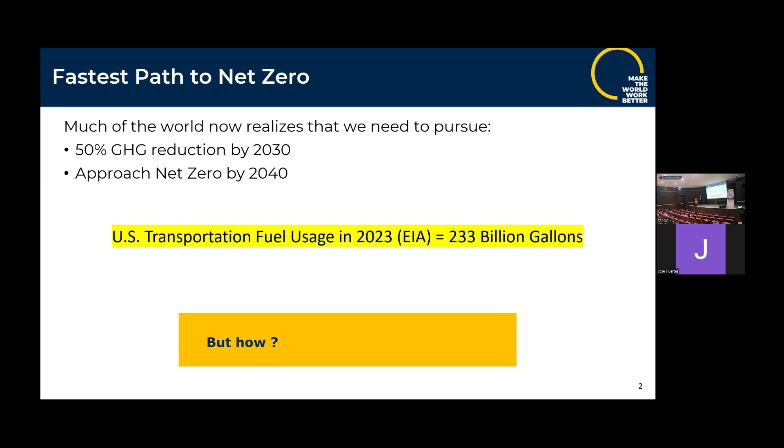So what do we do? I'm going to put on my timer to remind myself to stay on time. There we go. So how? Well, again, we can learn some lessons from the past, and that'll be part of what I'll cover this morning.

Okay, so what must we do? Well, we must replace the fossil energy we've been consuming, which is basically an interruption of the biogenic carbon cycle. In the biogenic carbon cycle, we have plants doing photosynthesis. Those plants are eaten by animals, and then those animals are eaten by other animals. All of us end up as dead organisms. And in certain unique circumstances in the history of the planet Earth, some of this biomass got sequestered and became the fossil fuels, an enormous reservoir of carbon. And we've been digging that out at an incredible rate all around the world and adding back carbon to the atmosphere that has been locked away for 30 to 300 million years.

What we'd like to do is move to something that looks more like the biogenic carbon cycle, where we're taking CO2 from the air through plants, or through direct air capture, or by capturing CO2 at the uses of fuel at point sources, and turning it back into fuel. Long term, that's what we must do, in addition to eventually removing some of the excess carbon dioxide from the atmosphere to get back to maybe 350 parts per million. So how do we do that? Well, we need to be mimicking Mother Nature and using the biogenic carbon cycle to create a kind of anthropogenic carbon cycle, a human-driven carbon cycle.

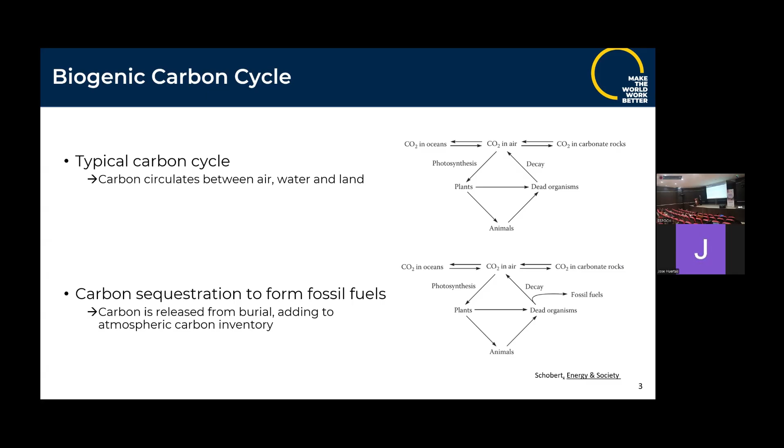So in the US and some of the world, we've been focused on vehicle electrification. We've started to have regulations in certain parts of the world, like California, that seem to indicate that engines are going to be banned, that engines are bad. Well, as I explained in our lecture yesterday on the future of the IC engine, engines aren't the problem. What we feed the engines is the problem, fossil-based fuels.

And now we have many choices we can make in electric vehicles. I'm driving an electric vehicle now because it was at a very good price, and it's actually a wonderful car. And even companies like Hertz were, for a time, renting electric vehicles. So imagine going to the city of San Francisco, California. You don't know the city, and you pick up an electric vehicle. Where are you going to charge? You might not even know your way around. So unless you had an app that could tell you where to charge, that might be a real problem and not a good idea.

So yes, the emphasis on electrification is perhaps too heavy. And in the US, it seems that consumers have signaled to industry that we need to go to something in between. Maybe there'll be more plug-in hybrids, which act like an electric vehicle but give you the unlimited range you might need on certain days. And that fits into the previous administration's blueprint for a future transportation strategy and how to decarbonize. We want convenience, otherwise consumers will not buy those vehicles. We need efficiency to use whatever low carbon energy we have as efficiently as possible. And it needs to be clean. It needs to be low carbon. It needs to lead to lower emissions from engines.

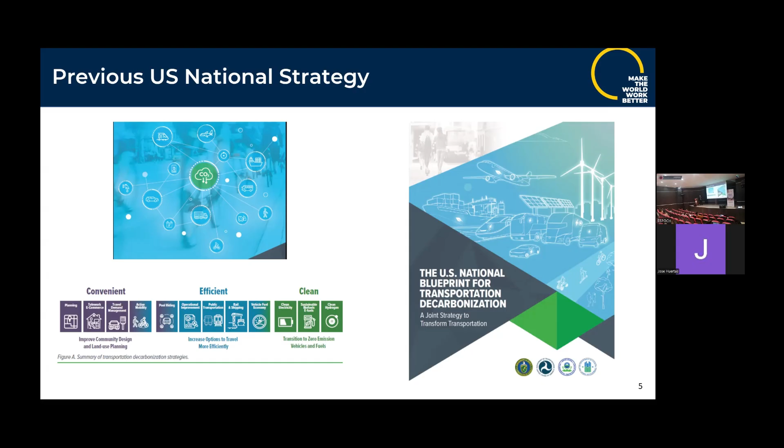In the final draft of this document from the Biden administration, they ended up adding a lot more emphasis on sustainable liquid fuels, which I thought was a good idea. All they had been talking about in the early years of the Biden administration is electric cars solving all our problems, and clearly that's not true, or ramping up hydrogen. While I'm very interested in hydrogen and I'm co-coordinating a hydrogen alliance for North America with a colleague at UC Riverside, hydrogen is going to take a long time to make much of an impact on our carbon emissions. So where we need to focus is sustainable fuels, mostly biofuels in the near term.

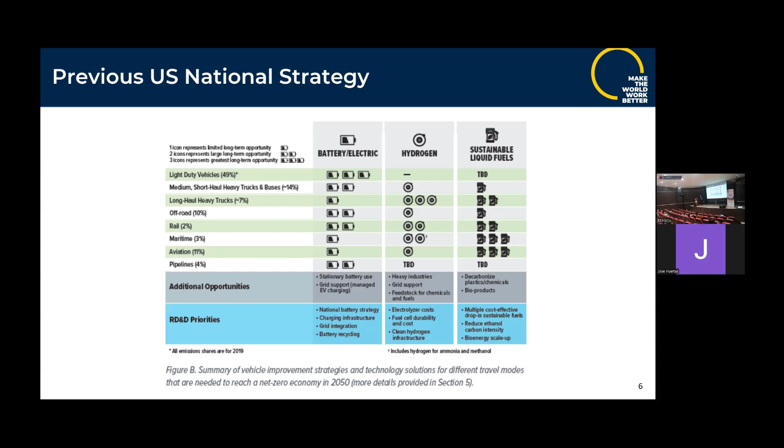In the US, we've had for more than 20 years an idea that we could produce something like 1 billion tons of biomass, which could turn into a lot of fuel. That billion-ton study, led by the Department of Energy, assumes we'll do this sustainably, so we can do it into the future, ad infinitum. From that, we could potentially get maybe 70 billion, and the newest number now is 73 billion gallons of fuel.

If we look at transportation, we use 233 billion gallons of gasoline equivalent between gasoline, jet fuel, and diesel fuel. If you take that and turn it into quadrillions of BTUs, that's nearly 28 quads. A quadrillion BTU, or quad, is 10 to the 15th BTUs—a convenient number to describe US energy consumption. We use a bit over 90 quads a year across all forms of energy.

I'll come back to that idea in a minute. But right now we consume about 9% of our total energy as renewable energy. In the transportation fuels area, maybe we can make 73 billion gallons of fuel. We could replace about a third of what we need with biofuel sustainably.

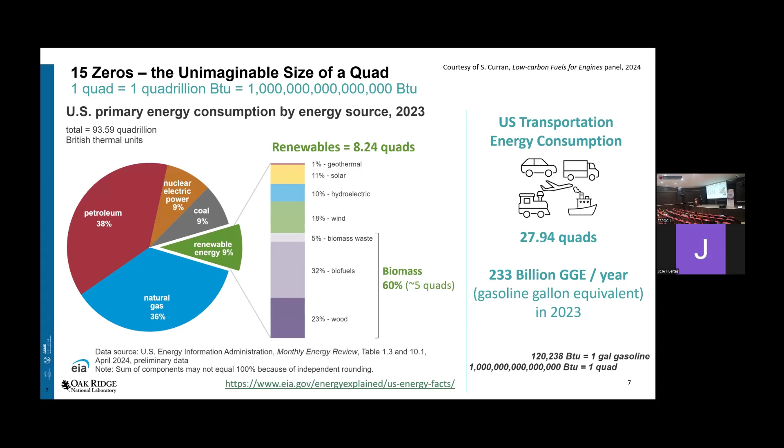So in that billion-ton study, they've looked at the different sources of biomass. This is where they've got this new number. This report, the billion-ton study, was updated in 2023. We think now we can make 1.3 billion tons of biomass from a variety of different sources.

This could be used, and needs to be used, to cover aviation fuel. We're not going to be riding around in hydrogen-powered planes anytime soon. We looked at that during the Reagan administration—my father worked on a project related to that. It's not a good idea.

So for aviation, we need liquid fuels from biomass or synthetic fuels. Off-road and rail may be hard to operate on electric, so they may need these biofuels too. We're also going to need some of this for on-road, long-haul trucks. So how this fuel gets used will be a matter of which has the highest priority. Decarbonizing aviation right now is a big priority in the United States, so a lot of that biomass is going to go toward making sustainable aviation fuel.

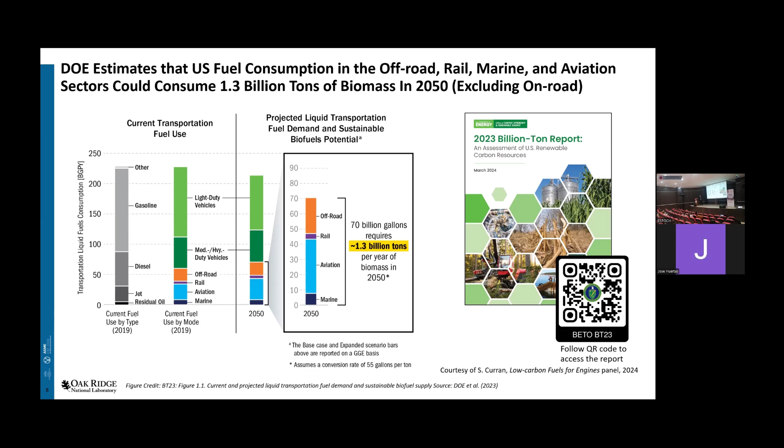If we look at how we might make this fuel, we'll continue in the US to rely on corn and oils from plants like soybean and canola, and maybe winter cover crops like covercress or Brassica carinata. We will make ethanol, biodiesel, and renewable diesel—fuels we're familiar with. Generally we need to make fuels we're familiar with because they have to meet codes and standards, or else they're going to have problems in the engines and vehicles we drive.

Another thing we see in the evolution of our biofuel and replacement fuels is that many of these fuels aren't like the fuels we use today, and that's going to create some challenges—meaning there's a lot of engineering left to do in internal combustion engines and low carbon fuels. We're far from done, and there's a lot of great discoveries to be made.

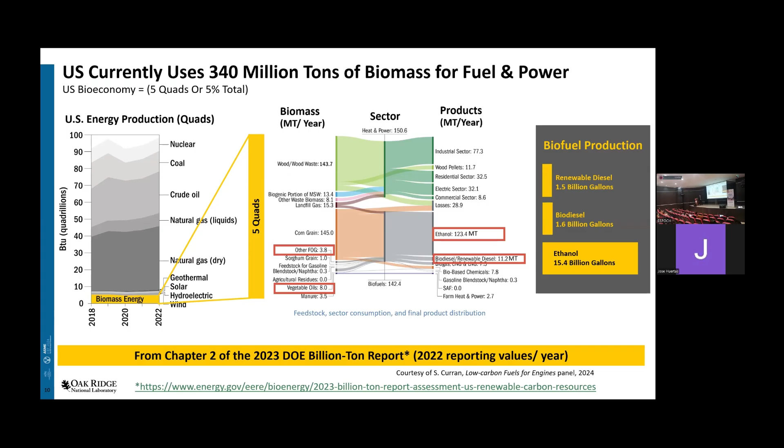Renewable diesel, from tables produced by the federal government's Energy Information Administration, showed in 2022 we made 18 billion gallons, over 17 of ethanol, 2.2 of biodiesel, and we had the production capacity to make this much, plus 1.5 of renewable diesel. I saw a report in 2022, while working on a book chapter, that said this was going to increase from 500 million gallons a year in 2019 up to 5 billion gallons a year by end of 2024. But there's no way. Well, in fact, in January 2025, we got to 4.5 billion gallons a year of renewable diesel production capacity.

There's so much pull for this in California, where they have to meet the requirements of the low carbon fuel standard, that there's a big pull on supply. It makes it hard to get this fuel in my state, Michigan. Our transit system, which I've worked with, has run a bus and other things on renewable diesel, but our fleet managers have said we can't count on getting the fuel, so we're not going to bother. But it worked great—it's a drop-in replacement, and that's why there's so much demand for it.

So this is explosive growth in capacity. We've reached something like 25 billion gallons total of biofuel. That's only 10% or so of what we need, but it's a lot more than we were making just 10 years ago. So things are improving.

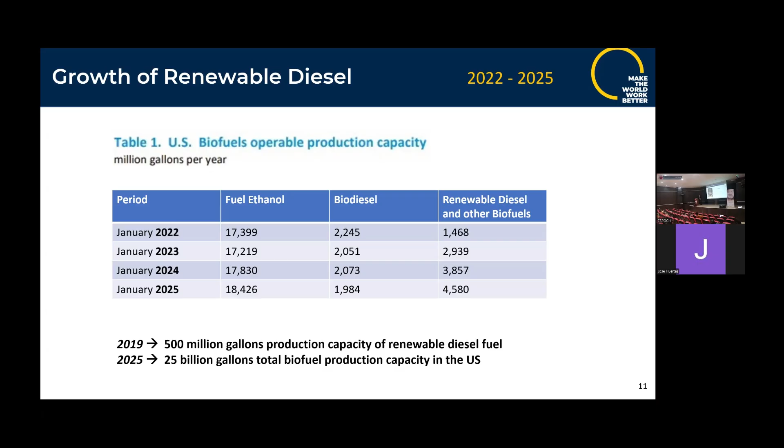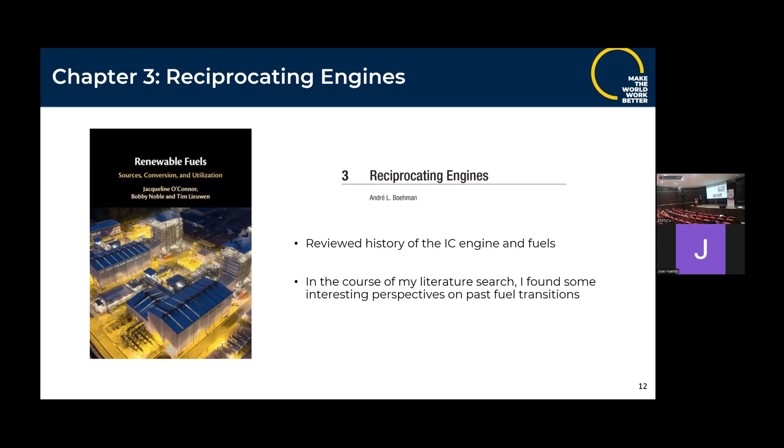So if we think about the United States just 200 years ago, in the 1800s, how did people get around? Well, horses and other animals—horse-drawn carriages or riding horses directly, mules pulling barges along the Erie Canal or other waterways, man-made or natural, throughout the United States. We relied on animals, and the animals are fed biomass. They're indirect bioenergy conversion systems. It's one way to look at it.

But then later in the 1800s, we started producing large amounts of coal. We're the Saudi Arabia of coal, the United States and China—we're both the Saudi Arabia of coal. We have 25% of the world's coal, as does China. So we became big coal producers, and we moved to coal-fired steam locomotives.

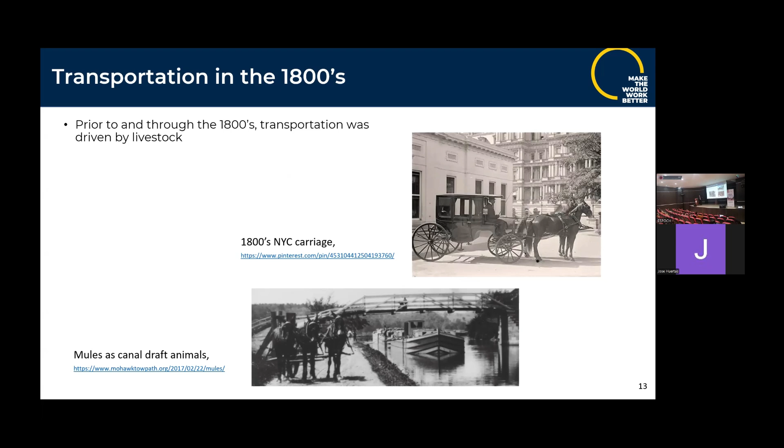This is one that you can still ride today in Steamtown National Historic Site in Scranton, Pennsylvania, where if you wear clothes that aren't your favorite, you'll get covered with cinders, as people used to when they rode these trains back in the day. What this is based on is a kind of inefficient fire tube type of combustion chamber.

Well, lo and behold, in the basement of the auto lab, we had a fire tube steam generator. I thought they were going to replace this with a turbine or something. No, they just put a natural gas fired burner on it, and we still heat our building with this old fire tube burner. The fire goes through the tubes and the water is around the outside, like a shell and tube heat exchanger. Very inefficient, but it works.

Then this is another image I dug up—this is a person shoveling coal into the coal-fired boilers that ran the Titanic. If anybody's a fan of the Titanic movie or the Celine Dion music from it, there was a scene with a tryst, some romance, and a little car down in the hold of the Titanic. In the background you'll notice there's the guy shoveling coal. I noticed that—probably everyone else is focused on the romance, but I found that interesting.

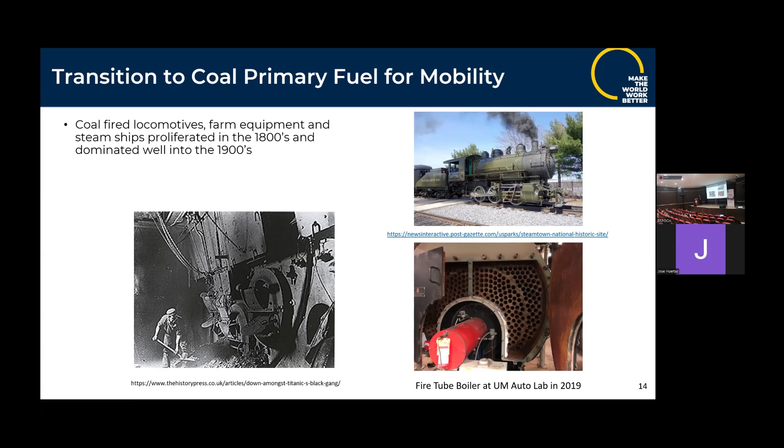So I was with my wife in Paris in June. We were on our way to Germany for a conference, and we're walking through the Musée d'Orsay, which has a lot of Impressionist art. There were paintings by Claude Monet, Vincent van Gogh, and an exhibition on posters from the late 1800s, early 1900s.

But what do we have here? We have Monet painting a bridge, Le Pont du Chemin de Fer à Argenteuil. It's coal-fired, and he's actually probably whitewashing the exhaust, as we would say. That should be black smoke, because that's a coal-fired locomotive.

Van Gogh, there's a story behind this version of his famous La Nuit Étoilée, Starry Night. He made various versions of this, and in this one he wrote a letter to his brother talking about how he tried to show the light from the gas lamps that lit this harbor versus the stars, trying to show the unique character of that light.

Well, these are gas lamps probably made from gas that came from steam treatment of coal. We would call it town gas. And then this poster is talking about basically kerosene that you could get to run your lamps or other lighting fixtures in your home. So fossil energy is on display at the Musée d'Orsay, if you pay attention.

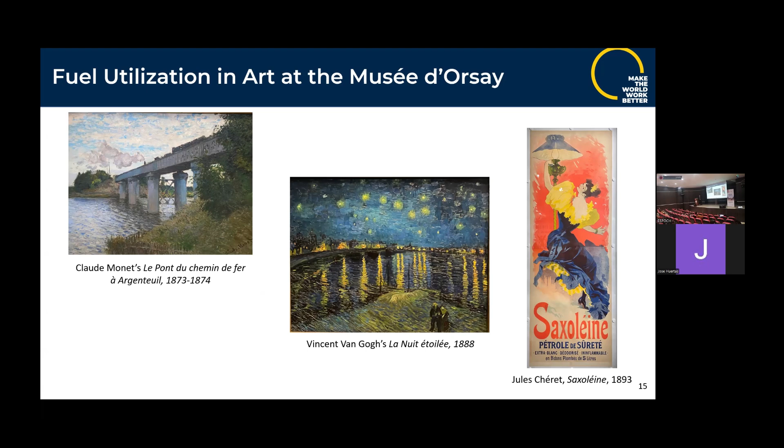So historically, we've used a lot of coal in the 1800s and well into the 1900s. Up until the 1950s, one of the most powerful companies in America was the Pennsylvania Railroad. Has anyone in the room ever heard of the Pennsylvania Railroad? No, things change. And as I was digging through information for this book chapter, I came across a book that was surveying engine technologies of the time.

First edition was in 1906. The edition I was able to get a copy of, the University of Michigan subscribes to lots of services, it's a wonderful tool for us. This later book was from 1913, and they're surveying the rising amount of oil being produced, of petroleum being produced, and comparing it with coal. And they come to this astounding conclusion, in 1913.

The world must mainly depend on coal for its motive power, whether it's in steam or gas engines. In 1913, this person, an expert in the field, could not see that soon petroleum would displace coal. Petroleum would begin to be used in locomotives by the 1940s, led in part by General Motors and Charles Kettering, the famous inventor and engineer who spent a lot of time in my hometown of Dayton, Ohio, so we're proud of Charles Kettering.

But this gives us a very valuable perspective. Once we were all in on coal, and we're hardly doing things with coal today, despite the claims of our current president. Coal is not a beautiful fuel, it's a rather dirty fuel.

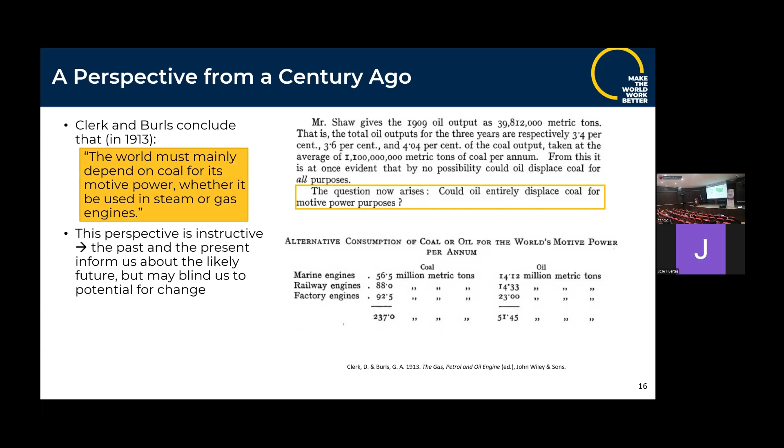So this is a slide from one of my favorite DOE scientists. They've long since retired, Jim Eberhardt. He was one of these people that would speak truth to power. He gave some very bold talks back in 2000, 2001, 2002 about our future with fuel. And I love this graphic, although it's scary.

So in 2023, we consumed 93.6 quadrillion BTUs. And the quad is 10 to the 15th BTUs. A BTU is a small amount of energy. One quad is a set of rail cars full of oil that stretches from Seattle to Miami, so go back and forth 94 times. That's how much energy we use in the United States.

When I first started my academic career in 1994, the number which sticks in my head to this day is Americans are 5% of the world's population, and in 1994 we were consuming about 25% of the world's energy. That has changed a lot with economic development in other parts of the world, but energy use scales directly with per capita income and global gross national product.

Though we and many other countries have gotten a lot more efficient, we were consuming something like, I think, in the high 70s. Well, in 1997, we consumed 91 quads. So in all this time, it has only increased by a couple of quads. How is that possible? More efficient cars, better lights, more efficient home heating systems and building heating and cooling systems. So we can make progress, a lot of progress, and there's still lots of engineering to be done.

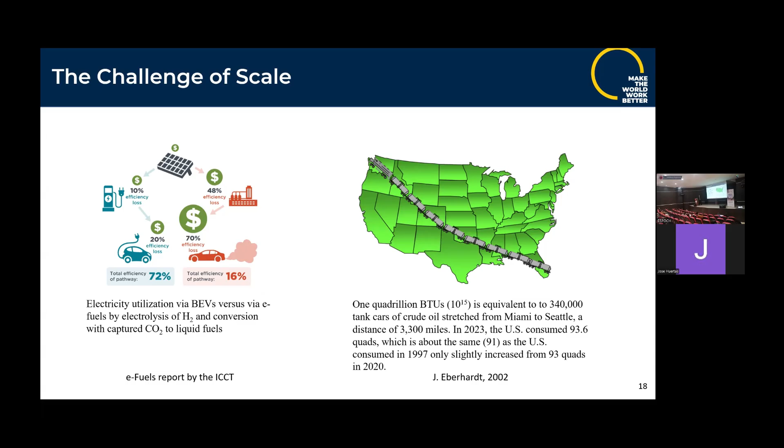Can we make this transition? We made the transition from coal to petroleum. We've been in the age of petroleum for decades.

It's instructive to look back at other transitions in transportation. Take the horse and buggy — by 1920, cars had overtaken horses as the primary mode of personal transportation in the United States. There are still horses. I've got friends with horse farms, and I love horses, but we don't need to move around on them and deal with the refuse they leave in the road.

The entire US interstate highway system — places like Los Angeles, New York, San Francisco, well, less San Francisco, covered with highways. And that all came to be in just 35 years, that whole system.

I was talking with some friends at breakfast who had driven on Route 66. My parents did that for their honeymoon — drove a convertible 1958 Corvette along Route 66.

The interstate highway system, the faster system, mostly replaced those regional and national roadways, but many of them still exist — Route 66 being probably the most famous. That system was a major undertaking, but it didn't take very long.

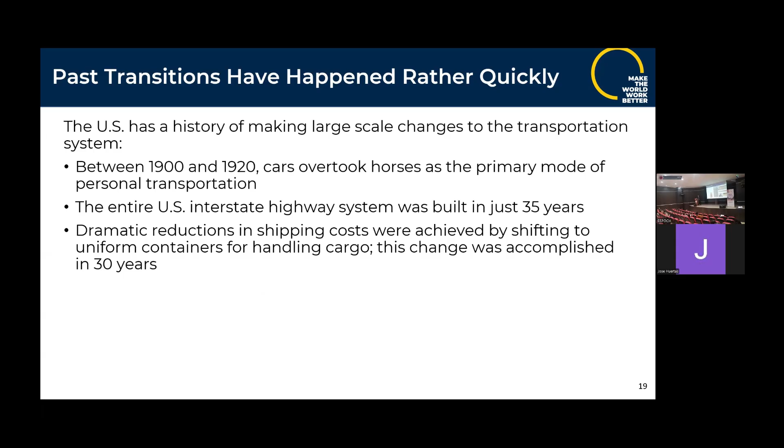Where I am at the University of Michigan, I serve as director of the Walter E. Lay Auto Lab. It's also kind of a piece of history — the building was built in 1957. When it was created, this plaque was put up to commemorate all the gifts from various companies that contributed to equipping the auto lab.

There's one remaining dyno, which we're getting rid of in a couple of months, with a little plaque: gift of Ford Motor Company, 1956. Many of the companies on this list no longer exist — Pontiac, Oldsmobile, those are General Motors brands that went away. Others reconfigured.

But we're still going, and we're focused not only on engines and fuels — combustion and motors, my area — but also on a growing area of work in batteries, whether for hybrid vehicles or full battery electric vehicles. So we're trying to prepare for this transition.

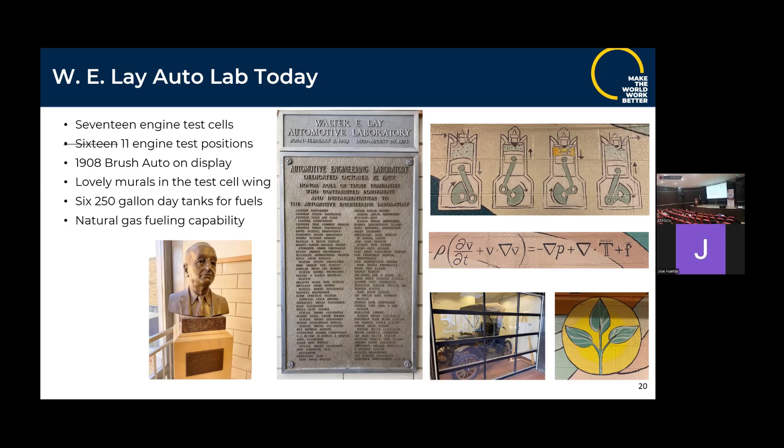At U of M we have 17 engine test cells — the largest, best equipped university engine lab in the country. But 3 of these are being turned over to study battery thermal management: one for the electric motor, one for the battery management system, and one for a full-size battery. So we're bending with the wind.

It's kind of like in American football, or even soccer — sometimes a defense will give a bit of space, let the other team have the ball, then go beat them in a fast break the other way. We're doing that here. Engines still matter — the engines aren't the problem, it's the fuels we feed them. But we also need electrification, as I'll explain. We need a bit of both.

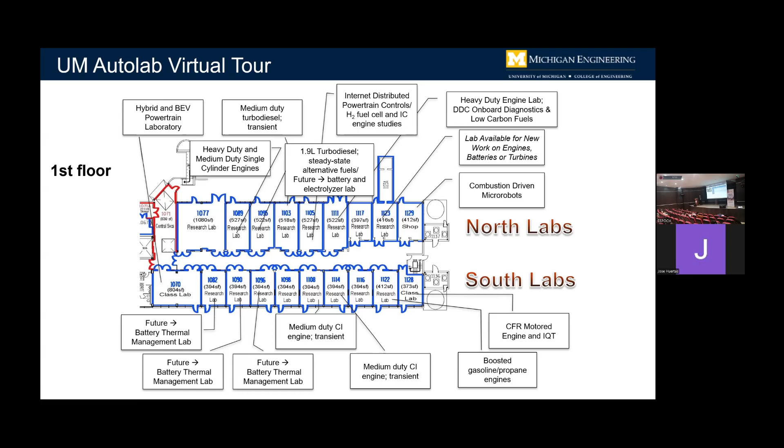Now, how can we quickly decarbonize? Well, we did an experiment.

This started the day the campus shut down for the pandemic, March 18th, 2020. I received this vehicle from General Motors and we drove it for two years — one year on diesel fuel to get a baseline, then a second year on 100% renewable diesel fuel. We showed that overnight we could reduce our carbon footprint by 87%. The remaining footprint was just 13%, compared to a 2005 Chevy Cavalier running on gasoline, an equivalent car.

I've been using President Obama's target, which was to reduce carbon emissions by 83% versus the 2005 baseline. That's a faster reduction than you could get in a Chevy Volt.

This is data from my Chevy Volt, using electricity carbon intensity from 2020. I had a Volt for two years, so I have a lot of data from it — I use it as a kind of living laboratory. With electricity in 2020, I could only reduce the carbon footprint versus the baseline by 79%. We can go deeper in carbon reduction, faster, with certain renewable fuels than we can with electricity.

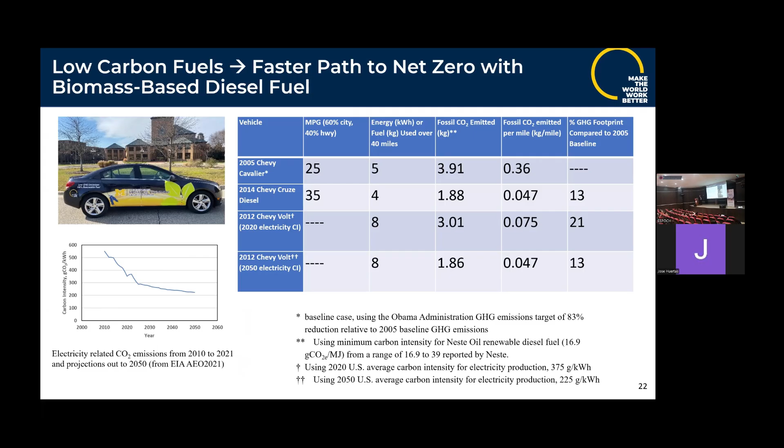But on campus, we've managed to do a couple of different demonstrations on renewable fuel, not only the Chevy Cruze that I drove, but we did work with the trash truck, we did work with the bus. No problems whatsoever. Our transportation and waste management services groups were both really helpful, and we showed them this is easy to do. Unfortunately, the challenge is finding the fuel. That's going to be a challenge for quite some time to come. But these kinds of fuels managed well can go right into the existing system and give you deep carbon footprint reductions. And our logistics system on campus handled them well.

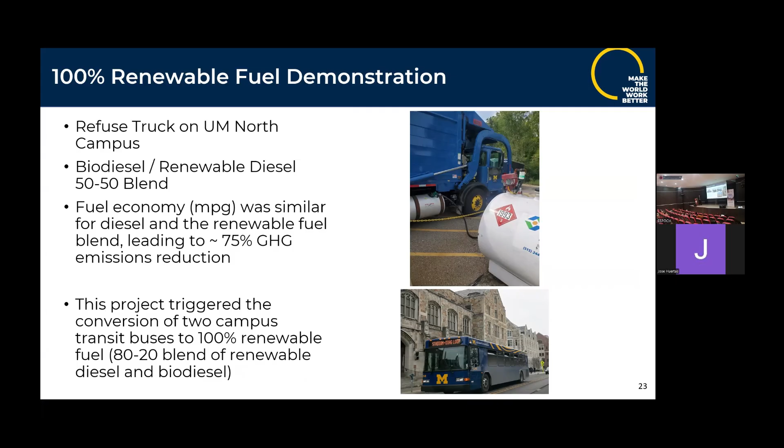I got to do a sabbatical in España in the fall of 2023. I did some team teaching with my colleague Lara and Anton, and then there's Arturo with us. And we hatched a plan to fulfill my research vision for that stay at the Escuela Naval. I wanted to help pathways to decarbonize Spanish maritime activities and the Spanish Armada.

And here's a training vessel the students go out in. You can see Galicia is often rainy in the fall. It rained for 6 weeks every day for part of the time I was there. The rest of the time it was beautiful. The beaches are beautiful, the people are so friendly, and the seafood is fantastic.

But we got to ride on this boat, and one of their 6 ships ran for 2 semesters this past academic year, went through 10,000 liters of renewable diesel donated by Repsol, no problems. And my hope with this was that we would show an entire group of future leaders of the Spanish Armada that being green, running on low carbon fuels, will not interfere with your readiness for whatever missions you need to do. And these will be the future leaders of the Spanish Navy.

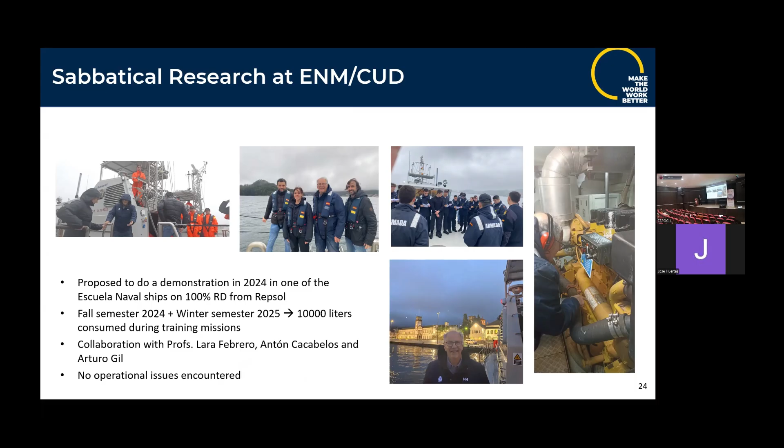Now, the transition with renewable fuel, renewable diesel in particular, is also very active. So we have this growth in production. We have acceptance of this fuel by companies like Caterpillar and Cummins. And in fact, in Cummins' press release from fall of 2022, they say this stuff is fantastic. It reduces by an additional 13% NOx emissions.

Because of that, you need less diesel exhaust fluid to combat NOx. Right off the bat, out of the engine, you get 50% less particulate. So that's going to mean that there's less soot building up in your DPF. And so Cummins fully supports, if you have one of their off-road utility engines, run it on renewable diesel. It just has to meet the diesel fuel specifications.

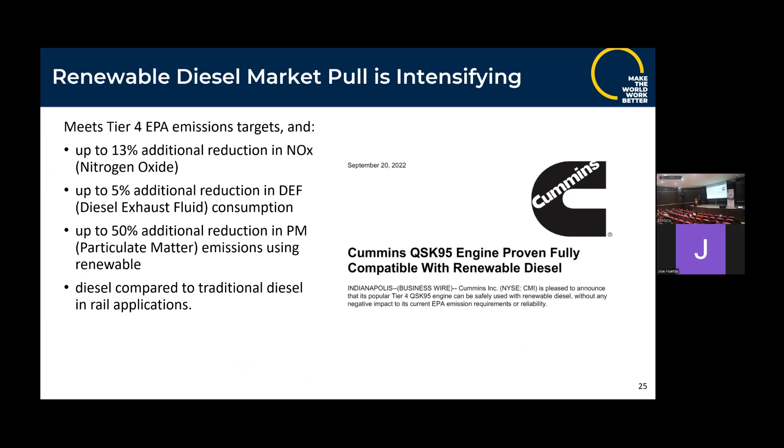So what do we do? How do we move forward? Well, this is from a very interesting paper in Fuel. This is from a group that includes Renewable Energy Group, which is now part of Chevron. So, you know, when you read something, you need to look at what platform is the writer standing on. Well, these are people who make renewable fuel, so obviously they're going to be telling you you should use renewable fuel, but their analysis is very interesting.

They considered if we stay on our path of using petroleum-derived fuels, and we compare that with a path of going to biomass-based diesel fuel, or if we go to a path of using battery electric trucks, or if we use a two-pronged approach, let's electrify where it makes sense, and let's ramp up the use of renewable fuels, so biomass-based diesel and battery electric, we end up reducing the cost of the carbon emissions that we're emitting by 75% versus business as usual, continuing to run on fossil fuel.

Could we advance one slide? Yeah, there we go, thanks. 75% reduction. The message is, yes, we need to electrify because we can't cover all the petroleum fuel that we need to displace with renewable fuels alone. We're going to have to electrify passenger cars, but those don't have to be battery electric cars. They can be cars with smaller batteries, creating less demand for critical materials, and still get you around in a way that is convenient and fun.

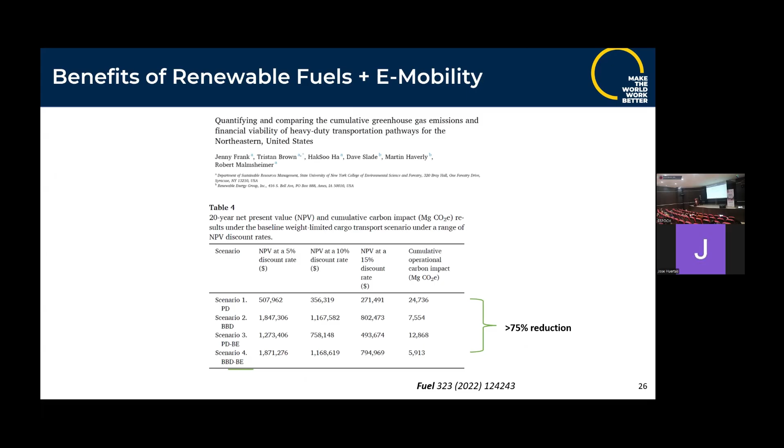One possible branch of doing things is to run diesel engines on ethanol, which might sound crazy, but a lot of different groups in the US have been working on this, including my most recent graduate, Dr. Joe Trzaska, to put ethanol as one option into your diesel engine. If we don't have enough renewable diesel for our trucks, and we have fewer cars on the road, we're going to need less ethanol in our gasoline. What do we do with all that ethanol production? We could turn it into other fuels, but we could potentially use that ethanol in trucks.

Scania did this 20 years ago with a very high compression ratio, and Clearflame, where my student Joe did an internship, uses intake charge heating, taking out the intercooler and EGR cooler to raise the cylinder temperature. If I want to make ethanol burn like a diesel fuel, I can, but I've got to get it hot as well as pressurize the cylinder.

And Joe's idea was to use exhaust rebreathing. Keep the intake valve and the exhaust valve open together a little while and draw back some of the exhaust. Simple technique. All it would take is a different camshaft.

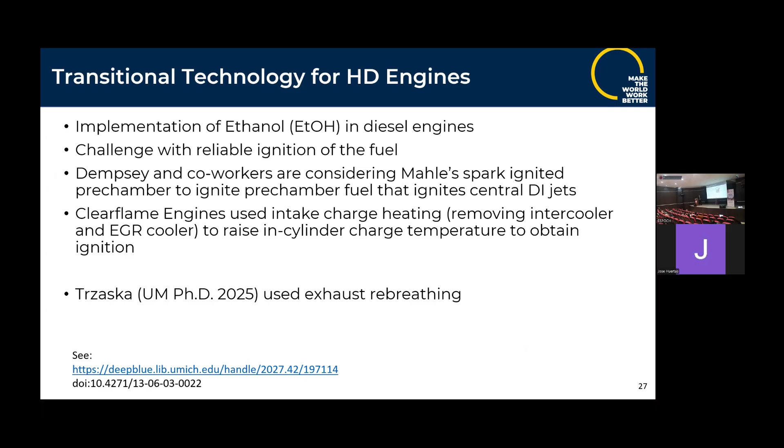What he was able to show is that by selecting an optimal exhaust rebreathing, exhaust valve strategy on an engine with a fully variable valve timing system, and paying attention to how much back pressure you have in exhaust, you can make the necessary amount of exhaust go back into the intake and be part of that next charge.

To jump to the conclusion: here's how we did it. We have this variable valve timing system, and he was able to operate with one particular valve timing strategy. We called that exhaust rebreathing 90 because we closed the valve at 90 degrees. That gave us plenty of heat in the cylinder to make this engine run on neat ethanol, with a little bit of lubricity agent.

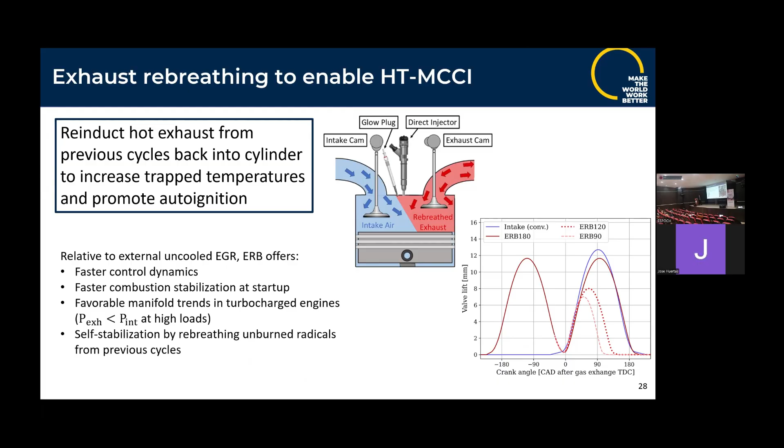The conclusions from that study were quite promising. Joe was able to make the engine operate at idle and at full load on pure ethanol, with no extra heating, just changing the valve timing strategy and optimizing the injection strategy.

Others are working on this in very clever ways. This was a simple approach, and there's some very good science in this, looking at how we might use pilot injections to help ignite that ethanol. But another example of things we can do that are practical, things we can do today. This could be done in a Volvo or a Peterbilt or other brand of truck relatively easily.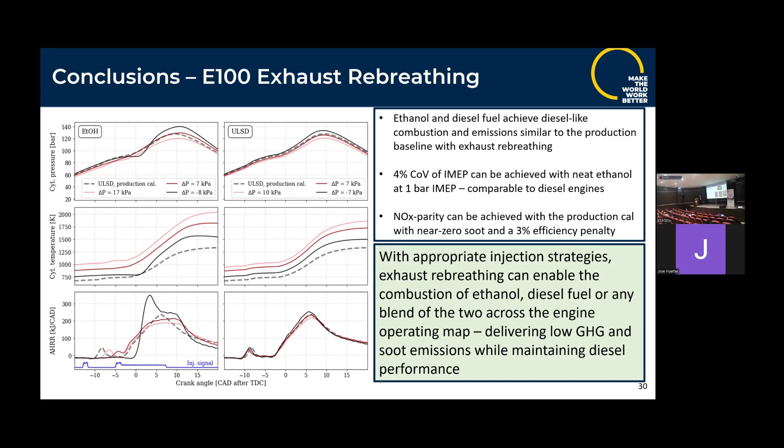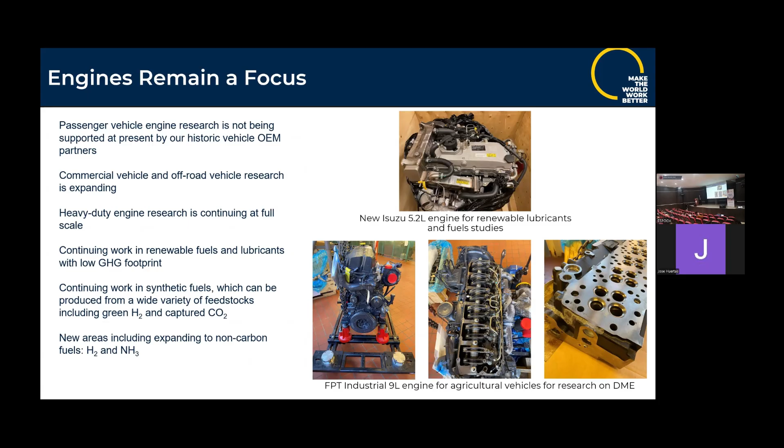So, the bottom line, we have solutions to this greenhouse gas problem. What I see is we can cover a third of our transportation fuel energy with biofuel. A third could be displaced through electrification. The other third, probably for some time to come, is going to still be petroleum. But that's the third we can work on by advancing hydrogen, ammonia, and other synthetic fuels. Those will take a while to ramp up, but they will be useful.

For the students, once you have these slides later, I suggest clicking on this link. I've not found a link other than on LinkedIn to play this video, but I show this in class. It's a fantastic little bit by Neste Oil. Again, they're a biofuel producer, so you have to think, okay, what platform are these people standing on? But it makes a fantastic argument for the need to roll out renewable fuel while we try and electrify, because we will not meet our carbon emissions reduction targets through just electrification.

All right, with that, I thank you for your attention.